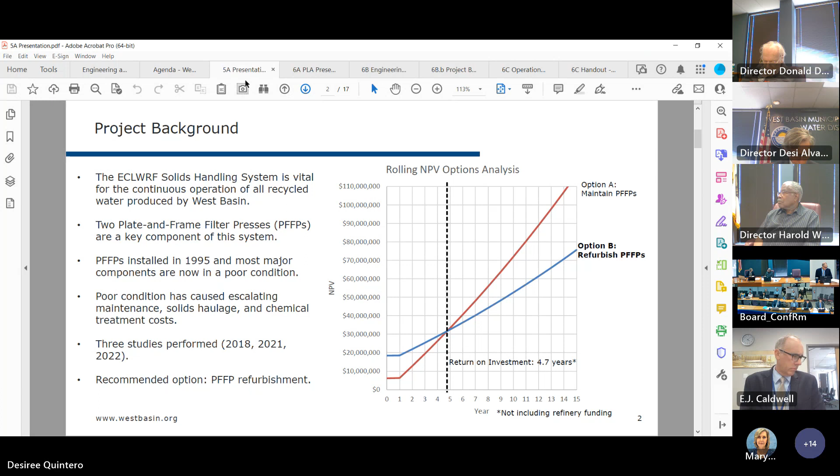Our current estimates indicate that we can reduce our annual expenditure from an anticipated $6.1 million per year in 2024 to around $3.1 million per year. So that's a saving of $3 million per year, or in other words, cutting our costs on this system by approximately 50%.

And it wouldn't just improve financial aspects. The solids handling system is such a critical element of our recycled water system that it has a major impact across our entire production. This has led to significant amounts of recirculating solids in the system at ECL, and these recirculating solids place considerable strain on our system. They wear out filters and membranes more quickly, and they foul systems more frequently.

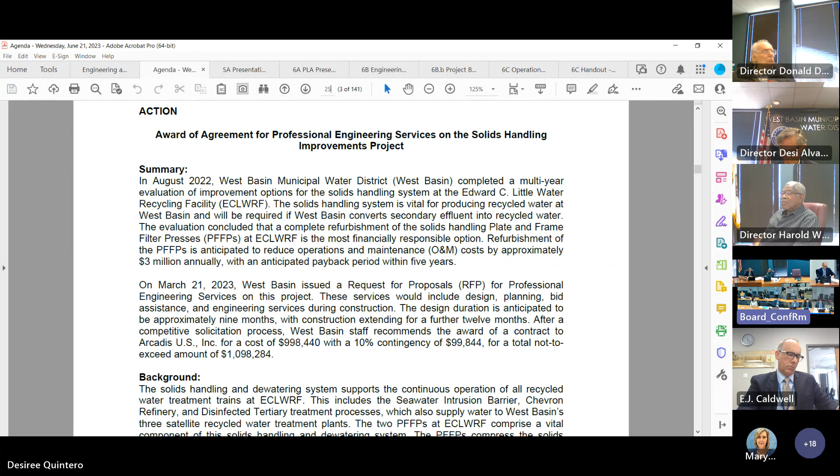On packet page 25, we have some images of other issues that occurred with the presses. On the right-hand side image, you can see where a seal failed in the pump reservoir, and the pump reservoir filled with sludge.

It is just one of the foul feed pipes between the pump and the presses, where they're severely constricted. You also see plate misalignment there, where carriages come off their rails. There's a number of issues we experience with these presses.

The costs will save us around $70,000 to $100,000 per month in haulage. So we get $700,000 to around $1 million per year. That $1 million, by the way, unfortunately, is with the new contract; $700,000 for the old contract. So it's $1 million per year.

Also, the oil pump is being discontinued. The manufacturer has already reached out to us numerous times saying a lot of the parts are not being manufactured constantly. So when some of the parts need to be replaced, there will be a lead time to replace those parts. That's one of the other factors that makes it important for us to refurbish or replace these pumps, to help us continue the operation that we need.

With the cloth replaced, we did see a significant improvement in our solids reduction. However, that's as much as how reliable those pumps can help us produce the pressure and give us the amount of solids to the press. So there are a number of significant components that need to be addressed as part of this project.

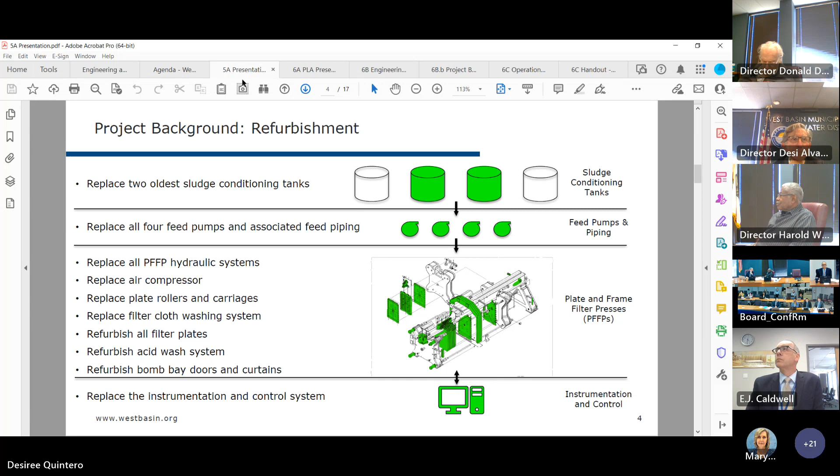If the project contract before you today is awarded later this month, staff intend to come back to the board later this year with both the recommendations for the procurement awards, so that's the off-the-shelf in-kind items we talked about earlier, and the results of the preliminary design report. This preliminary design report, PDR, will contain updated estimates on both project costs and the projected payback period to facilitate further discussion about project progress with the board.

Go back a second, there's something for that. Where you just mentioned preliminary design report, how does this work? Talking about awarding a design contract, right? Design and engineering services during construction. So the design portion is about $830,000, and the engineering services during construction is... What is, on the engineering services portion, or the design services portion, I'm sorry.

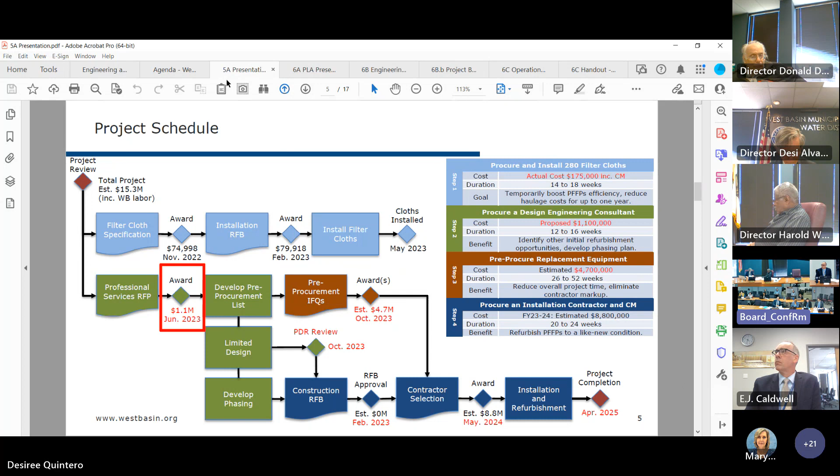What are the major task elements? Do you do a preliminary design? Yes, so the major task elements, I've got a slide that goes through them actually. If you don't mind, onto the next slide. The next slide goes through the design phase and what's contained within the scope of work of this contract.

So you can see here, you've got obviously the general coordination and project admin is a standard task. We asked the consultant to verify that 2018 condition assessment. I'll go into it in a later slide. It's very important for risk, a lot may have changed since 2018. We want to make sure before we get into construction on this project that we know what we're dealing with. We want to make sure there's no components we previously thought were okay that now need refurbishment, replacement, and so on. So that's quite an important task of the project.

Then we go into the preliminary design report, and it's arguably the most significant task here. Its role will be to review the condition assessment verification, delineate components between those that can be pre-procured off the shelf or in kind, and those that will require full design, the pumps, the tanks. And then it will list every component requiring replacement and refurbishment with associated costs and lead times, and produce a 30% design package for those items needing full design.

The aim of this PDR is basically to have a comprehensive check-in point where both staff and the board can assess project scope, progress, and most importantly, that return on investment number. So that's what the PDR will aim to do, and we're aiming to bring that back before the end of the year. We've got a very accelerated schedule on this. PDR would normally take much longer, but that's the aim of the accelerated schedule is to reduce those O&M costs.

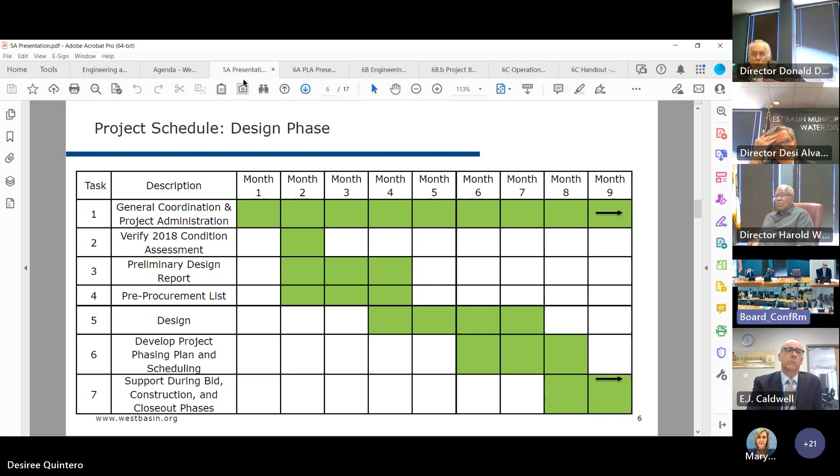As we discussed before, this project has a potential payback period of 4.7 years. There are several things that could change this. The project coming in under budget would obviously reduce that return on investment, bring it forward, and likewise an over-budget project would increase it.

It's also important to note that this estimate assumes that our influent water quality remains steady and reasonably good over the next few years. If we have a dip in water quality from Hyperion, that would raise our baseline O&M cost considerably as we try to extract the excess solids from the system, which would make this project more vital and potentially significantly reduce that period, because a refurbished system can better remove those solids from the system as they're put in.

But the 4.7 year target is our baseline. The aim is to shorten that payback period as much as possible. This project will be managed with that payback period in mind. Every time we have cost and schedule forecasts updated, they'll be assessed against that criteria.

The intention here is that every time I bring this project back before you, we'll give you an updated number, and the aim is to have that number slowly ticking down over time as we approach that payback. If that number increases it or even reduces it, we'll bring that before you so we can discuss any impacts and available options to us.

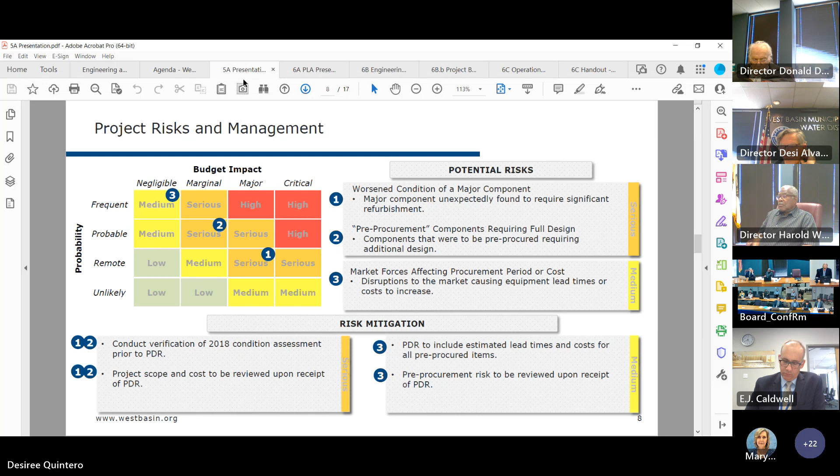Can I ask just one thing on the verification? So you mentioned 2018 - 2018, what happened?

It's a pretty hands-on operation now. Why aren't the O&M people out there able to assess further deterioration of systems and say, hey, wait a second, we need to replace this also or these components? Why is it that we would need additional verification 4 years later that wasn't ongoing?

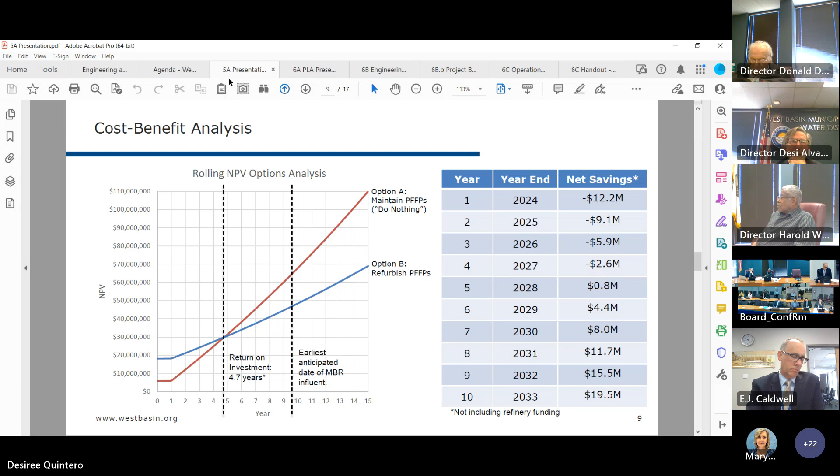Applicants state on the procurement system they were participating, which means they've downloaded the documentation and clicked a button stating they intend to participate in the process.

A pre-proposal presentation site tour was conducted on March 30th. It was attended by 14 people representing 6 different consultancies. On May 11th, West Basin received 3 proposals reviewed by 4 West Basin staff members over the following week, according to the scoring schedule you can see in attachment.

The interviews consisted of a short presentation followed by a set of questions asked to each candidate. They were scored out of 20, added to the proposal score for a total of 106 available points. The highest scoring candidate was Arcadis US Incorporated, recommended on a best value basis with a total negotiated cost of $998,440. The individual scoring can be viewed in detail on attachment B.

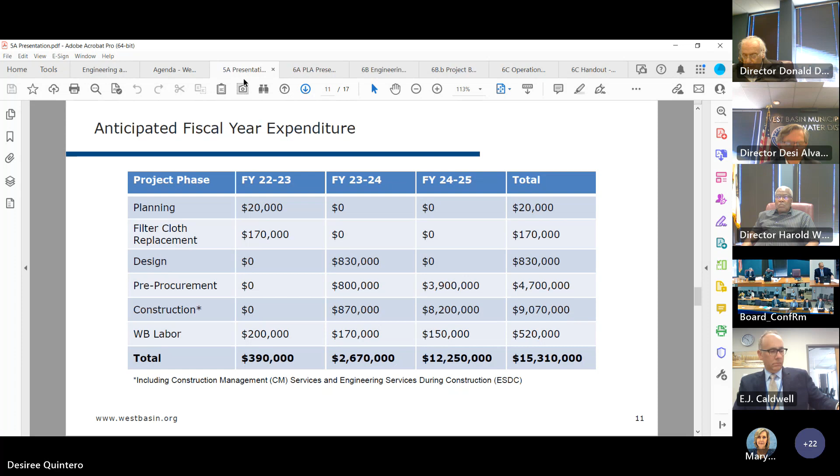This penultimate slide details the entire project expenditure from the early internal work in 2016 through to the projected end of the project. By the time this project concludes in 2025, the total anticipated expenditure will be $15.95 million.

As of the latest refinery agreement amendments in 2021, West Basin has secured $2,635,590 of refinery funding. This brings our total expenditure across the life of the project to $13.31 million.

I'd note if we were to base our return on investment rate purely on our own expenditure and remove the refinery expenditure, that 4.7-year break-even point reduces to 4.2 years. It should also be noted that this refinery funding has been paid to the district via monthly installments and would need to be refunded if this project is cancelled.

Next slide. That brings me to the recommendation for you today.

Staff recommends awarding the contract for professional engineering services on the solids handling improvements project to Arcadis US Incorporated for a contract amount of $998,440, with a 10% contingency of $99,844, for a total not-to-exceed amount of $1,098,284.

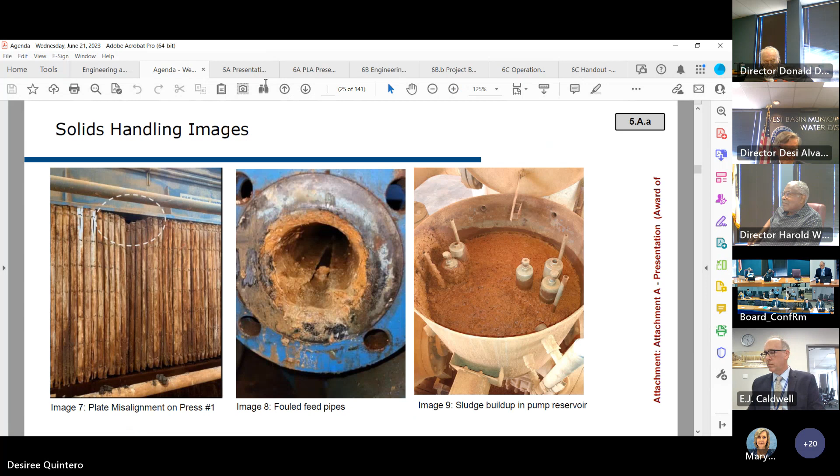Thank you, EJ. Good afternoon, Chairman Alvarez and members of the committee. As EJ mentioned, today I'll be speaking about the developer agreement between CDC Mar East Campus 2 and West Basin regarding the Nash Street lateral project. On page 27 of the agenda packet, you'll find a copy of the staff report shown on the screen. I'd like to start with some background information about the project itself.

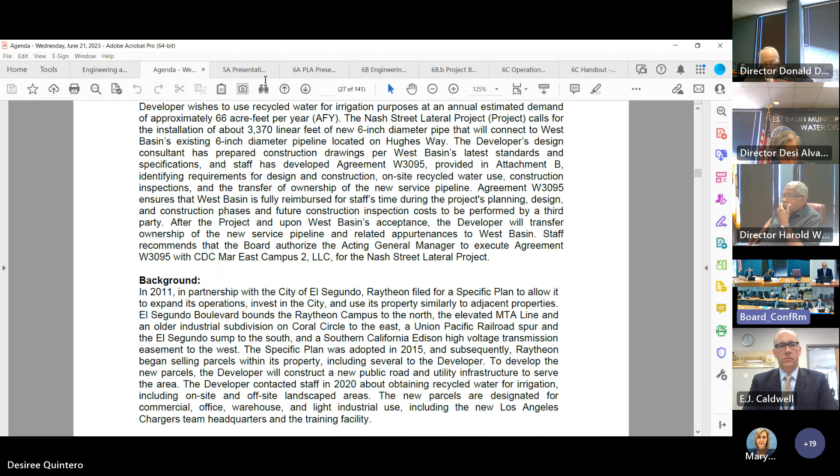Back in 2011, in partnership with the city of El Segundo, Raytheon filed for a specific plan for its campus to allow expanded use of its property. The specific plan was adopted in 2015, and subsequently Raytheon began selling parcels, including several to the developer CDC Mar East Campus 2.

As part of the specific plan, the developer will construct a new public road, an extension of the existing Nash Street, which will be dedicated to the City of El Segundo upon completion, along with new utility infrastructure that will serve the newly purchased parcels.

Back in 2020, the developer contacted West Basin staff about obtaining recycled water for irrigation, including on-site and off-site landscaped areas. The new parcels are designated for commercial, office, warehouse, and light industrial use, including the new Los Angeles Chargers team headquarters and training facility.

For context, if you turn to page 30 of the agenda packet, you'll see a project location map. It may be hard to see, but in the middle, that peach color is the Raytheon campus itself. Going from north to south on the east side is the proposed street extension, and the Chargers facility is highlighted on the south side in that neon color.

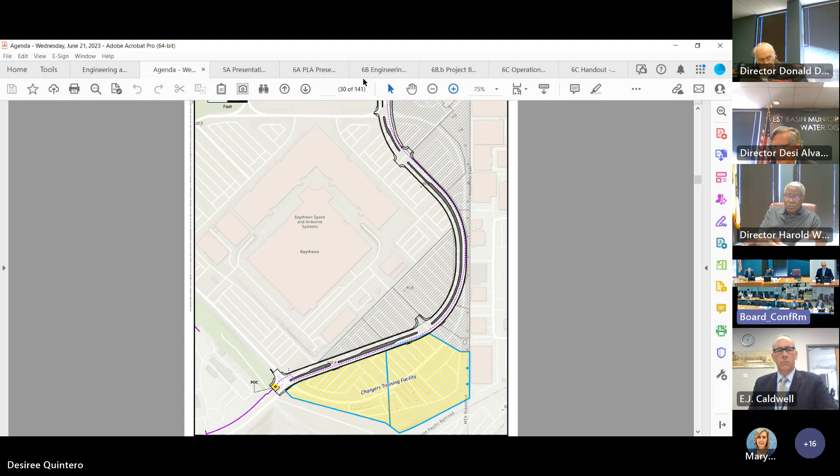In coordination with West Basin's legal counsel, staff have developed developer agreement W3095, shown on page 31 of the agenda packet. Some requirements: the recycled water service connection construction drawings shall be reviewed and approved by staff prior to construction, construction of the new service pipeline shall be inspected by staff and third-party inspectors, and the developer shall fully reimburse West Basin for all staff, consultant, and third-party inspector costs incurred for design review and inspection services.

We've actually estimated those costs now. Prior to execution of the agreement, the developer will give West Basin a check for those costs, currently estimated at about $96,531. The developer shall also fully comply with all recycled water use requirements.

Construction of the pipeline is estimated to start around September of this year and be completed the following month, in October. Upon completion of the project and acceptance by West Basin, ownership of the new service pipeline shall be transferred to West Basin, which includes a 12-month warranty period where the developer shall be liable for costs incurred by West Basin due to deficiencies in the newly installed recycled water infrastructure.

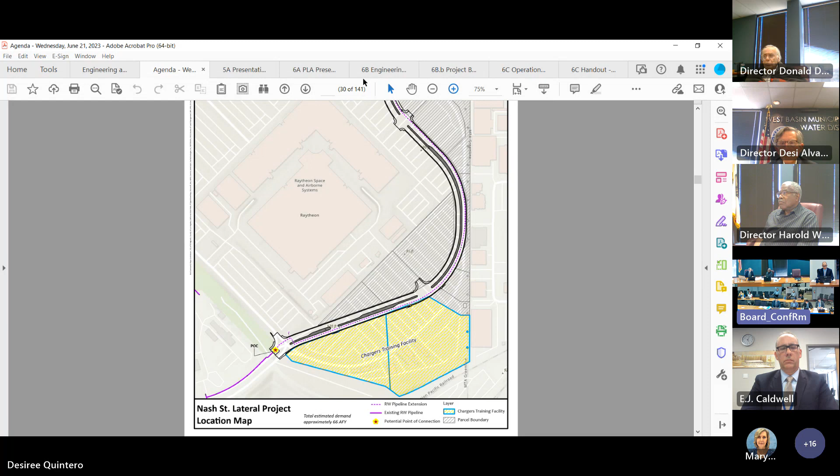At this point, I would like to read the recommendation: staff recommends that the board authorize the acting general manager to execute agreement W3095 with CDC MAR East Campus 2 for the Nash Street lateral project. That concludes my presentation. I'd be happy to answer any questions.

Director Williams, any questions? It's pretty straightforward to me. No. Director Dear? I have one question.

So we're going to be installing, you said it's a 6-inch line? They will be installing it, yes. So why are we not connecting it to the recycled water line in El Segundo?

And completing the loop? We did consider that in the past. One reason we didn't was because of the line itself on El Segundo Boulevard—I believe it's a pre-stressed concrete line—and tapping into it raised concerns about its age, since that line serves our north system. So we did not consider connecting to it at that time; it's just going to terminate just off of it. We did consider it at one point, but it was ultimately decided not to connect.

This is something the developer should be paying for. Yes.

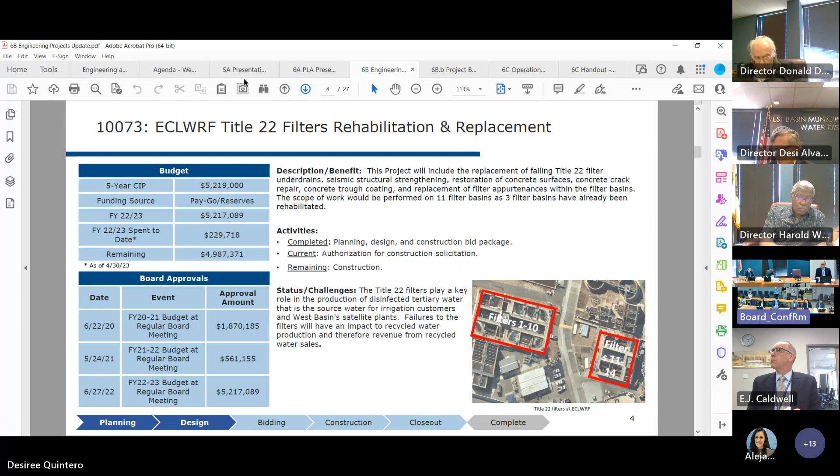We also provided you, at the request of the directors, an additional attachment, attachment B. The first part is the familiar information you've seen every month covering the actual project budgets in this year's CIP. We added a section which includes the engineer vendors, and as we go through this presentation about the update of the CIP, we'll get to that final section. I'm prepared to answer any questions you may have on that.

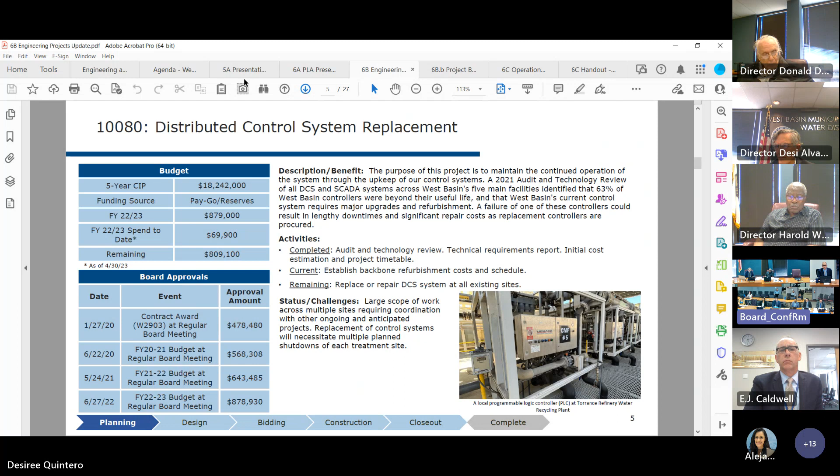But for the first highlighted project, I have Veronica here to give you an update on the Palos Verdes Recycled Water Pipeline Project. You can turn to page 7 of the package. And directors, this is basically an exhibit that we have been working on with the City of Torrance as well as our designers.

This is part of the agreement that the City Council approved when the pump station was approved for the new location site. One of the items requested was to produce exhibits that would provide education regarding recycled water. So we've been working with the city, and the exhibit you see in front of you is one of the exhibits that has already been reviewed and approved by them.

So these will be posted along the fence that will be surrounding the pump station, and basically just gives a little bit of information in regards to recycled water and where it's coming from, and a little bit of illustration of our distribution system.

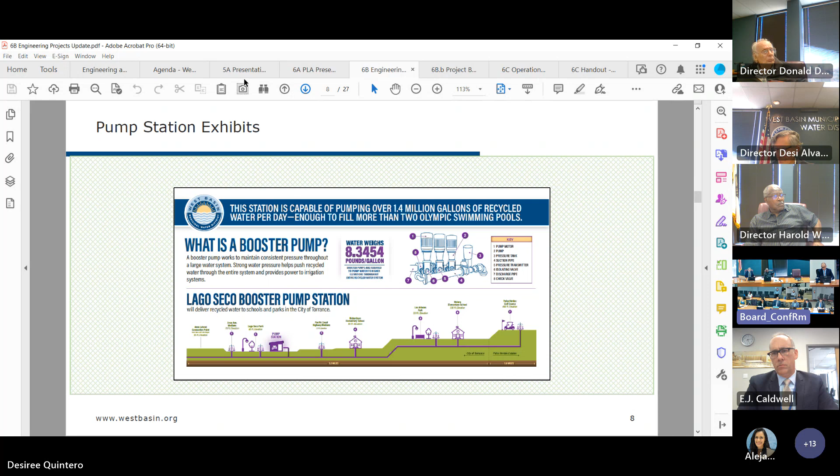On the next slide, this is the second exhibit that will be shown, basically showing the information regarding why the pump station is important. I think you are familiar with the image below, it has been a complete hit with everybody. I feel like that provides a lot of information on why it's important to have a pump station where the elevation is very low.

In the next exhibit, please, the next page. So this is just basically a status of the project. We awarded the construction of the pipeline component to Blois Construction in March, and we have all contracts executed. We have issued already a notice to proceed to the contractor with the date of June 26th. In the next couple of weeks, we're going to be having our pre-construction meeting, so we're in the process of organizing that with cities as well as all the team members participating in the construction team.

We are also anticipating the starting of the construction bidding process this coming June, at the end of next week. So that will be going up for bid. We're going to be advertising for more than the 2 days we typically give, because one of the requirements, as a good faith effort prerequisite on the loan, is to allow the contractors to advertise for 30 days. As you might remember, during the pipeline we went through that process of extending the time to allow for that good faith effort. So we're anticipating that, and our plans are to come to the board in August for construction award.

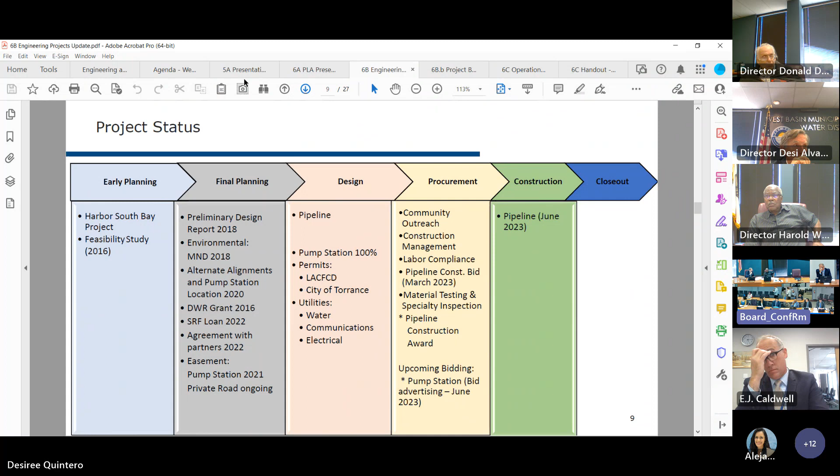On the next slide, please. So the next slide is basically an anticipation of that schedule, starting with the construction of the pipeline on June 26th, and then it's a 270 calendar day construction, so our anticipation will be March of 2024. And then the pump station advertising starts again at the end of June, with a pump station completion in May of next year. Again, our plans are to come to the board for construction award in August.

In anticipation of all the construction activities we are going to be having, we're also working with our public information department in regards to community outreach. Murakami Communication is one of the team members who will be doing all the outreach on behalf of the pipeline project as well as the pump station.

We have already drafted the notices that will be sent out, so it's just a matter of filling out the blanks with dates and the starting locations. That way it will facilitate the process. After July 4th, our community outreach team will be going out to the streets to do one-on-one canvassing and outreach to all the community members along the alignment.

In regards to any advertising on the website, again, our public information department will be working with the team and will provide that information to directors so they are aware of the activity that is happening.

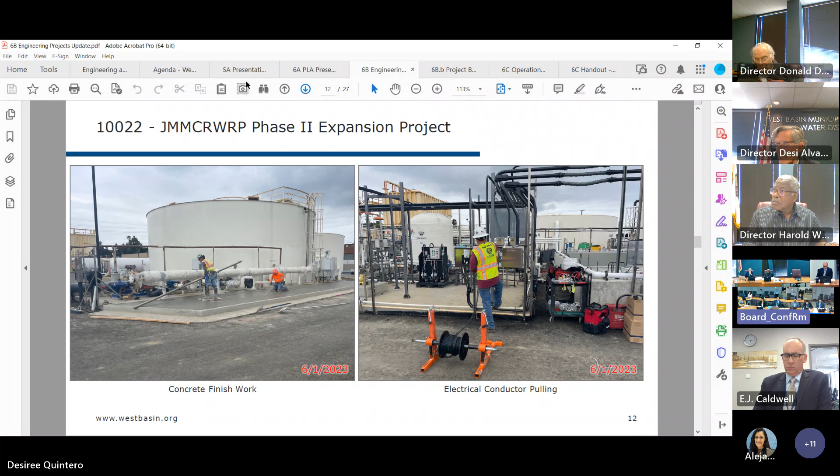On the left-hand side, workers are installing a concrete housekeeping pad. We're starting to finish up things around the site. You can also see that the base course for the paving road has been placed in front of that. On your right-hand side, we are pulling a lot of electrical wire to set up the controls and power up the system. Edison itself has been out to the facility to drop a transformer and also to tie in various circuits that are out there.

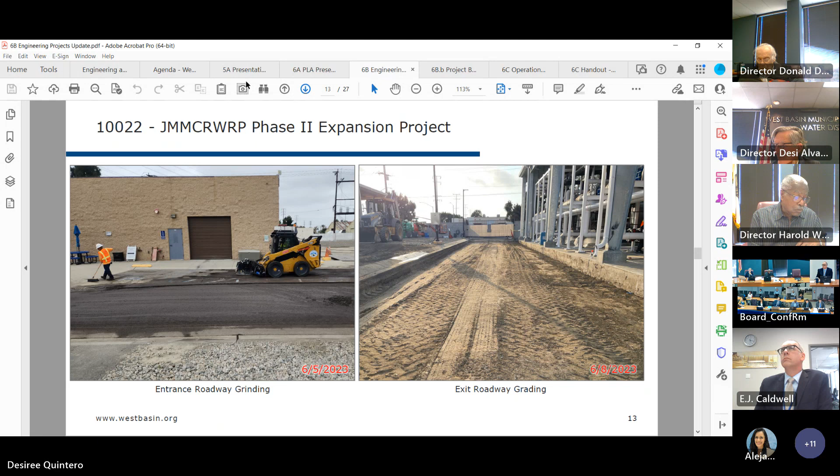Next page, please. As you're seeing on the right-hand side, this is the exit road leaving out of JMM Carson. To the right, you can see the structure of the CMF facility. On the left-hand side, they are doing some grinding right in front of the entrance building where the control room is. We're going to drop down to the next page, page 95.

The subcontractor is installing piping as well as putting coating on the piping, in both of those pictures, right and left.

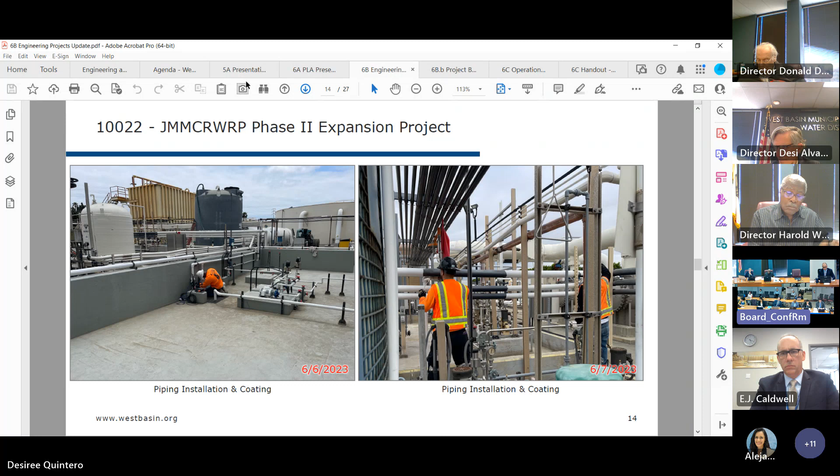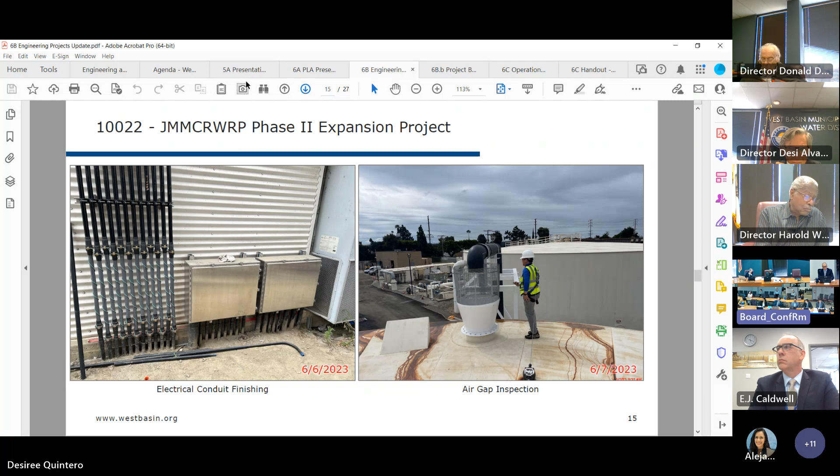On slide 97 is an overall schedule update. We're in the process of checking into delays that were caused by procurement, the inability to get certain type of parts. If you've gone out to any other wastewater sites, they're always asking if you have a spare VFD or some spare controller parts. But anyway, we've experienced a little bit of delay, and the team is addressing that right now.

The cost of construction to date is at about 83%. The requested RFIs, you've had quite a bit of them, 298. Of the 298, 293 have been processed. The total number of submittals for this project to date is 355, and we've processed about 349.

One of my favorite parts of this project is the next slide, the PLA. Again, we're reporting on the PLA to show that Tier 1 has a 34.9% participation. Tier 1 consists of people that live within 10 miles of the DLD building. The at-risk or transitional workers have a 7.7% participation. These are people who are challenged when it comes to getting jobs - they may have experienced homelessness in the past, they may be single parents. There's a whole list of criteria. The contractor has been exceptional in his ability to utilize apprenticeship, our next generation of skilled trade workers that will be building for us.

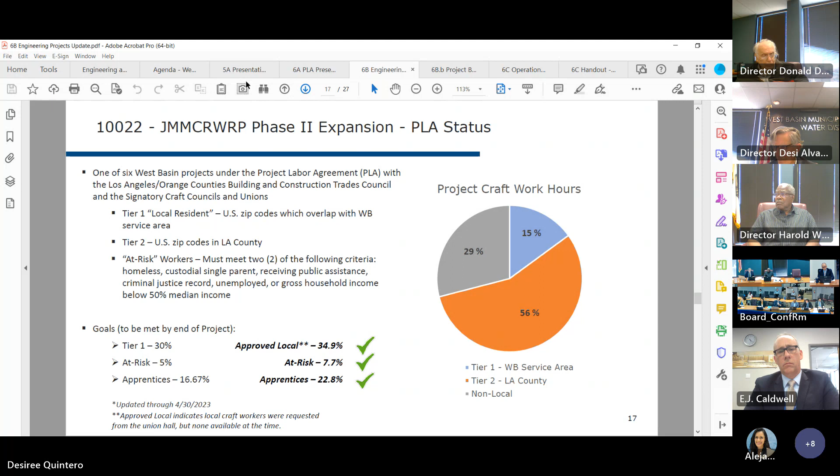Next page, 99. These are the numbers here, broken down by division and also by tiers. It's important to do a realization on that. This is your value added to the community, and I know that's part of the mission of this board and this organization - to engage the community and create job opportunities whenever possible. And so you can see the total to date on this particular project...

We've created well over 35,000 total hours. And we're talking about really good paying jobs - generally the lowest paid person on this particular project is the first year apprentice, which is half the cost of a journeyman. The first year apprentice makes approximately $21 an hour. It takes about 3,000 hours to become a journeyman on this course of developing a trade. So the utilization of the apprentice will help these people get to their journeyman level.

Moving on to page 100, this gives you the classification of the workers out there: carpenters, cement masons, electricians, iron workers, and so forth, and what division or percentage of the division these skilled craft people actually come from.

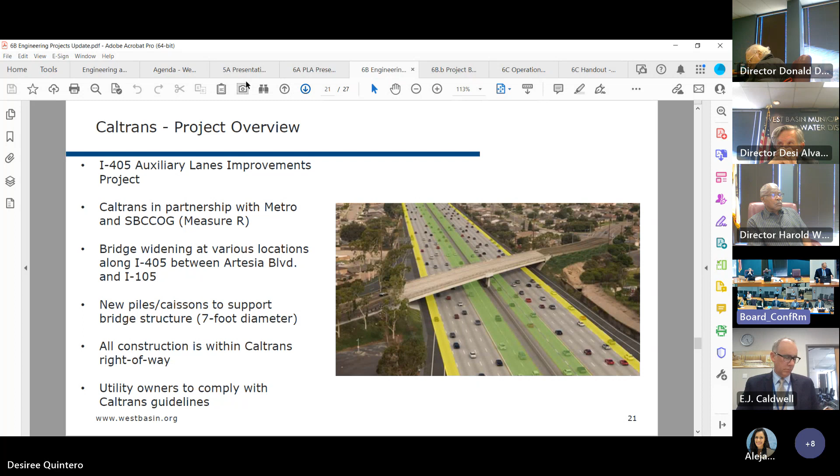So here we are right now on page 103 of the agenda packet for those that are following along.

Back in October of last year, 2022, HDR, which is the onboard design consultant for the Caltrans project, reached out to staff to discuss the potential conflict with our 42-inch recycled water pipeline at Marine Avenue and the I-405. This section of pipe was installed in 1993 through an encroachment permit with Caltrans, being that it is their right-of-way.

And without prior rights as well, meaning that we must adhere to Caltrans requirements in their right-of-way. Based on the latest Caltrans utility permits manual, recycled water pipelines are deemed to be high priority utilities.

So what does that mean? Essentially, they require either to be relocated or encased to prevent a line break from washing out either existing foundations or new proposed foundations. So they consider this to be pretty critical for their project.

At Marine Avenue specifically, 2 piles are being proposed, one on each side of the I-405. Per Caltrans, they're requiring us to essentially encase the pipe 30 feet at each location. So being that there's 2, they're requiring 60 feet in total of some kind of pipeline encasement.

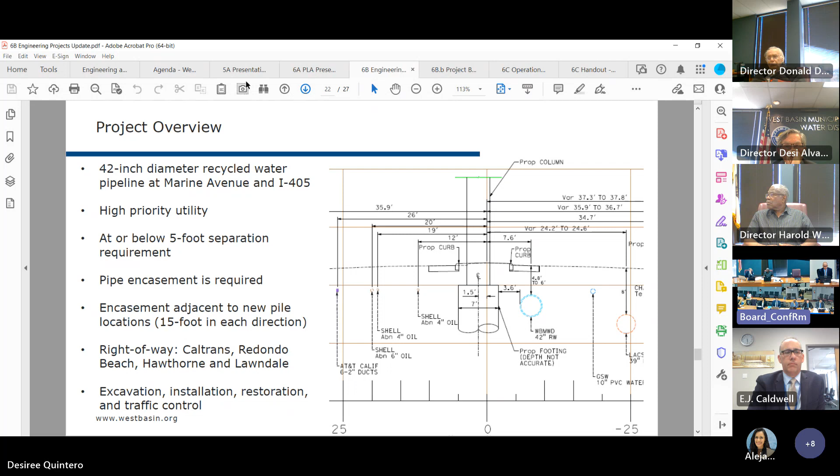We are now on page 104 of the agenda packet. Staff prepared an RFP for the preparation of plan specifications and estimates for the pipeline encasement. Per Caltrans, we specified that the proposed encasement shall comply with Chapter 600 of their Caltrans Utility Permits Manual.

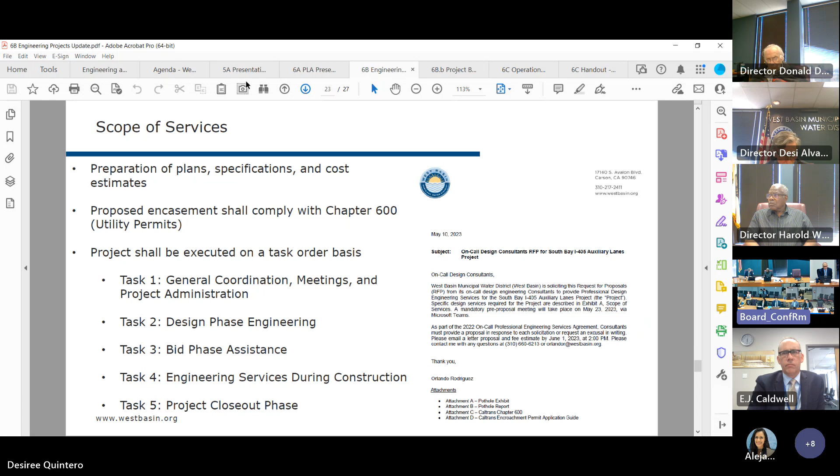The project shall be executed on a task order basis. So everything ranging, as you see there, tasks 1 through 5, from general coordination, meetings and so forth, all the way till the project closeout phase for this. Next slide, please. We are now on page 105.

On May 10th, last month, staff issued an RFP to our on-call design consultants. Following the issuance of the RFP, we held a pre-proposal meeting on May 23rd, attended by 3 of our consultants: AKM, Black & Veatch, and Tetra Tech. Proposals were due on June 1st, and we received 2 proposals, one from Black & Veatch and one from Tetra Tech.

We reviewed and evaluated the proposals internally, and Tetra Tech was deemed the highest rated consultant. We submitted references, called them, and they all gave glowing remarks about Tetra Tech. So last week on June 15th, we notified Tetra Tech of the contract award, and then issued a contract release for $143,000 for design services, which will start next month for the design of the pipeline encasement and so forth.

One other point: the original proposal amount was about $167,000, so we were able to negotiate them down to $143,000. Also, I wanted to clarify that at that particular location, the pipe is actually ductile iron, not steel, so apologies for that.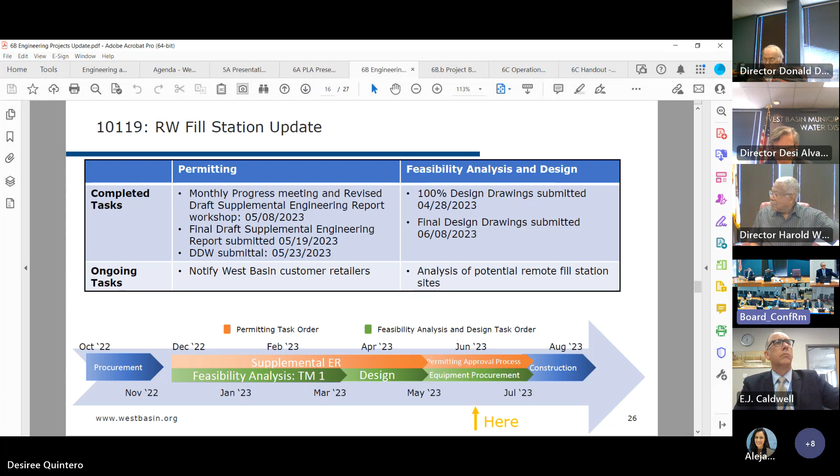Do you have any questions on this? And are you happy with the community outreach? Yes.

So right now, on that one, I just wanted some clarification, because we awarded the contract for the pipeline construction, and the notice to proceed is gonna be issued next week. It was issued already. Oh, the starting date is June 26th. Okay.

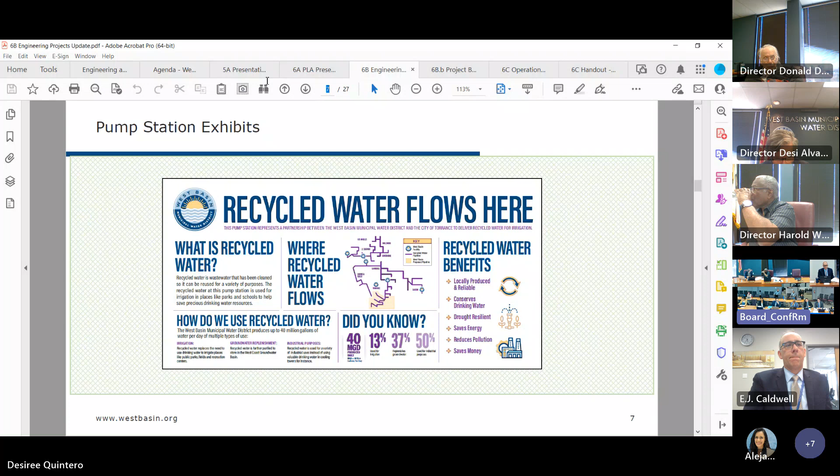So next week is the kickoff of the actual construction start date. The pump station then is pretty much on target to move forward with the schedule that's provided here, or is there going to be some slippage on that?

Can you repeat the last portion? On the pump station, is that schedule you gave us today pretty much going to be on target, or is there some potential slippage on that one?

So right now, this is our expectation. We have met many times with all the permitting agencies and addressed their comments. This is basically the bid package that is addressing their comments. We are submitting this bid package also to those agencies for final approval, but we have gone through all their comments and met many times. Unless they come back with something completely different, which is not our expectation, this is the schedule we're looking into.

Right now our anticipation is to include that time that contractors do need for that good faith effort. So we'll be bringing the results of the bidding — that's our plan, coming in August.

So you're gonna go one more round of submitting, you got comments from all the permitting agencies you gotta deal with, for your final incorporated that in the contract drawing, and that is under review one more time. No, we did that already, so this is the final.

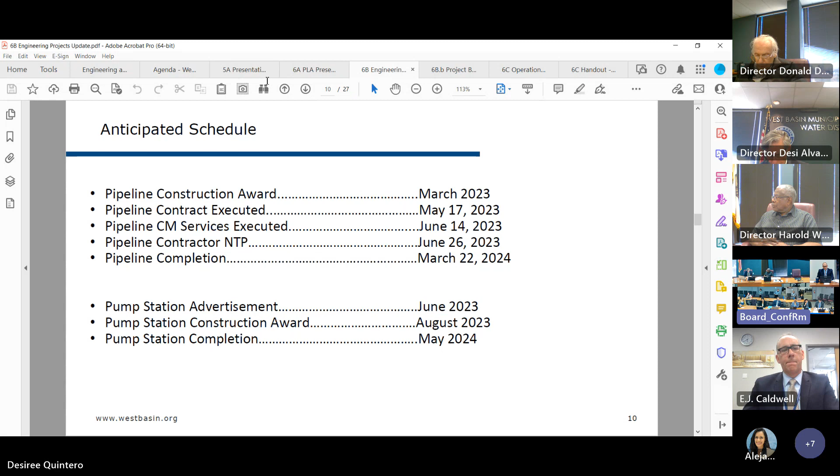Last month on that project we talked about a couple of things, and I would like to get some updates on that. One was the addition of the enhanced garden along the sidewalk there in the frontage of the plant. How is that coming along?

I don't know if we got authorization to actually do that work. Where we left it off is that you authorized us to go get quotes and come back and see exactly how much it's going to cost. I believe that was the direction.

This is with the landscaping? Yeah, that's correct. So I'm just wondering what's happening. Did you get the quotes yet? We haven't gotten the quotes yet, we haven't seen the quotes yet. Because I think when that presentation was made last month, there was an estimate for what that would cost, and the presentation stated there was going to be sufficient funds available and other savings in that project to pay for that.

All right, maybe next month when we update this project we can address that issue.

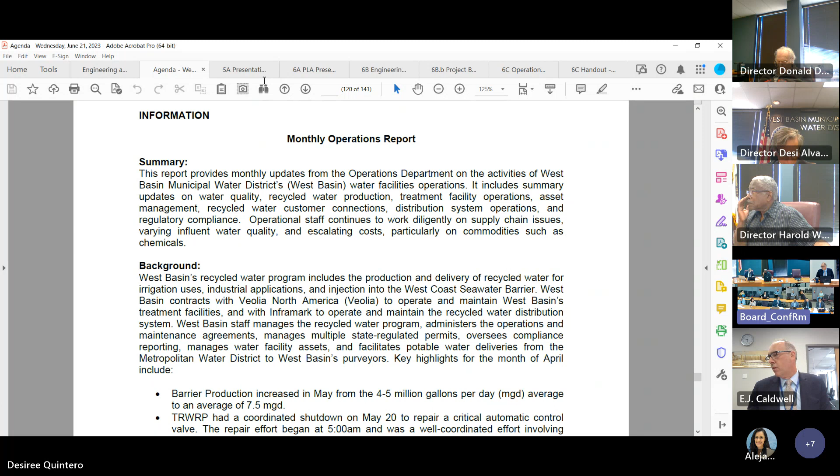Good afternoon, members of the committees. In the interest of time, I'll just point out highlights and then direct you to a couple of specific slides, and for additional questions, just point them out and we'll be happy to answer. So the memo begins on package page 120.

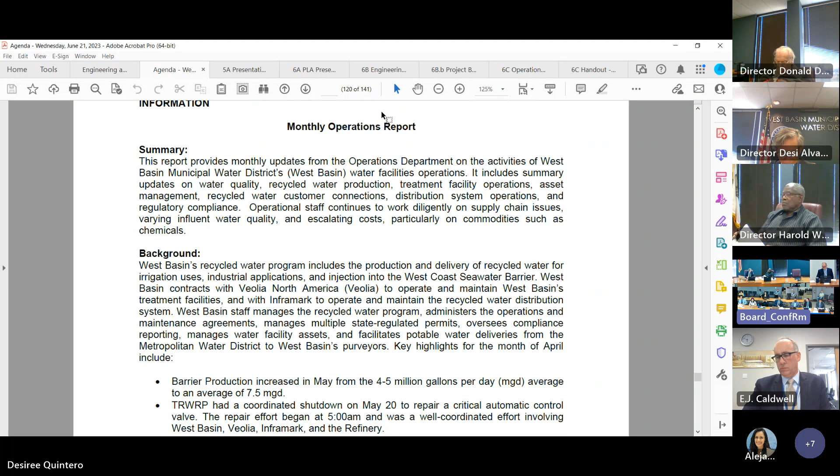I'm happy to report that Barrier productions have increased from previously 4 to 5 MGD to now 7.5 on average in May. We're actually targeting about 9 MGD currently. So that's on the Barrier productions.

In May, we also completed a couple of well-coordinated shutdowns with the 2 satellite plants, one at Torrance. That one was a replacement of an automated control valve that included a 1-day shutdown, well-coordinated with PBF as well as Inframark. There was also a shutdown related to the Phase 2 project at JMM. That project also involved Inframark, Veolia, staff, and Marathon. So we completed those shutdowns.

Currently and continuously, we are working with PBF to resolve electrical issues that has resulted in multiple and continuous power blips at the plant, which resulted in intermittent interruptions to operations. So staff, West Basin staff, Veolia staff, and PBF electrical engineers are working on that together with SCE to resolve the issues.

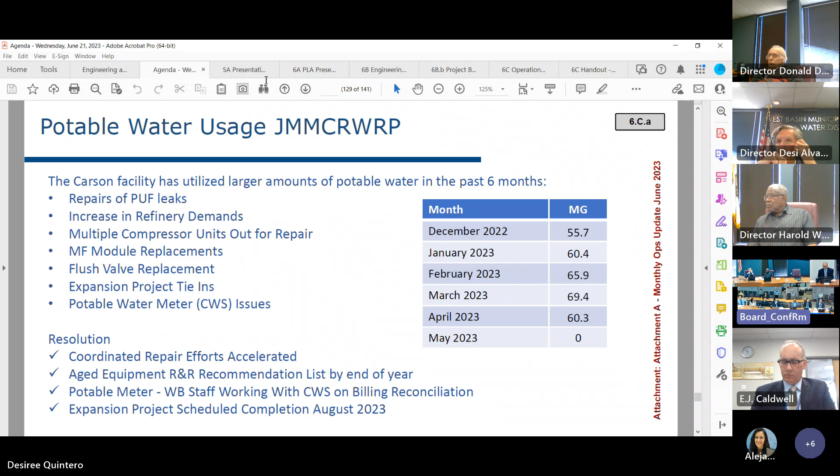They have digesters with mixers in them. Those mixers were installed a long time ago, and the design is such that every time one fails, it's a massive effort - they have to drain the digesters. Every time they drain the digesters, it impacts the stream that comes to West Basin. They have 20 digesters, 4 of them are down right now, and they're doing repair on the mixers.

In a few months, they're going to start cleaning the primary clarifiers, which will directly impact us too. So we are anticipating a spike coming in as well. Once they're done with the primary clarifiers, they think that cleaning is going to go throughout the year, all the way up to December. After that, we're going to start with some cleaning efforts on the secondary clarifiers.

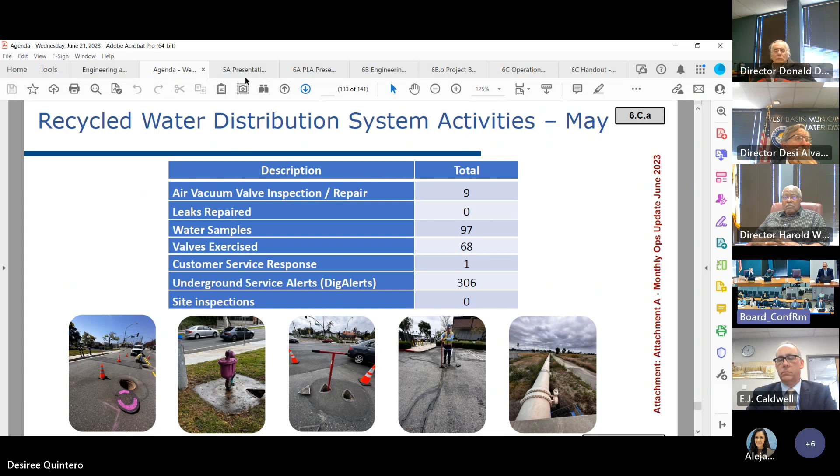We also have an ongoing repair in El Segundo. The work started today. This is due to a broken 6-inch valve. The valve was broken in the closed position - well, it wasn't completely closed, it just doesn't allow enough flow for all the customers downstream, as shown on the map here. We don't have valves to allow us to isolate that specific valve to allow for replacement.

Without actually having to shut down the entire Title 22 system from the Edward C. Little facility, the work is going to entail a hot tap of the 42-inch line. So we're going to build a new service to tie into the existing service line at that location. We don't have isolation valves up to that point from Edward C. Little.

The work is being implemented as a critical repair per procurement code through Inframark, and Inframark solicited bids from a total of 4 contractors. They received 1 bid. The cost proposal from Inframark will be $86,432, barring any unforeseen conditions in the work that they may encounter in the next several days. But we anticipate that we will come back to the board for ratification of this work at the next board meeting on June 26th. That completes my update.

Thanks, Frank. You said they went out and solicited bids and only got 1. Who's the bidder? J.A. Salazar. Doty Brothers does an awful lot of work for them - why didn't they get a bid from Doty Brothers? They solicited bids, they did request bids from Doty Brothers, T.E. Roberts, and Excel Paving, and J.A. Salazar is the only contractor that responded.

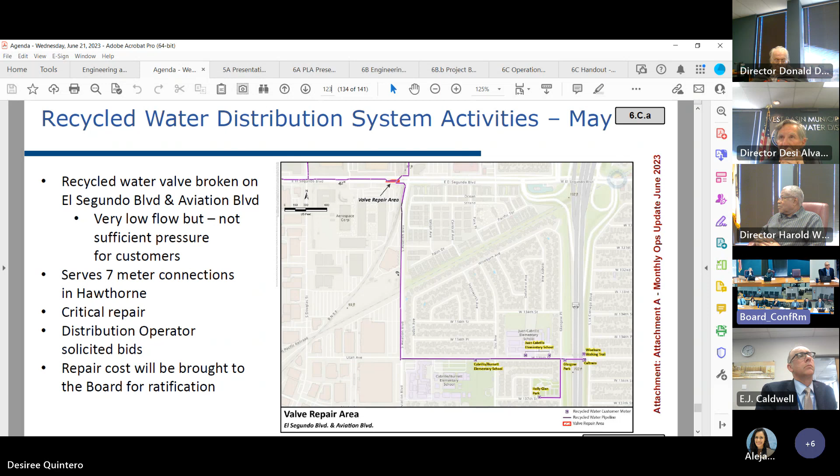And we've never gone back to the City of Los Angeles and demanded that we need to have a very consistent water supply as an influent for our operation. I think that when we go talk to them, that should be the focus of where we should be going, that we should be asking for and demanding a fairly consistent effluent from them, an influent to us.

I understand what you just said, that in order for them to meet the ocean discharge standard of the permit, and since nobody's enforcing the permit on this side of the fence, we're the easy off-ramp for them to meet that. That's not right, okay?

So as we talk to them, we should be doing that. Then I also heard all about all of the work that's going on at Hyperion Treatment Plant. And the indication is that the results of that is going to cause some more impacts on us.

So again, that's not acceptable, that they have to do the work. I don't deny that they have work to do there all the time, but it is not acceptable that we have to bear the brunt of the fact that because they're doing work, the influent water quality for us is going to be even more variable, and we're going to continue to expend money that we otherwise wouldn't have to expend if we had a consistent stream.